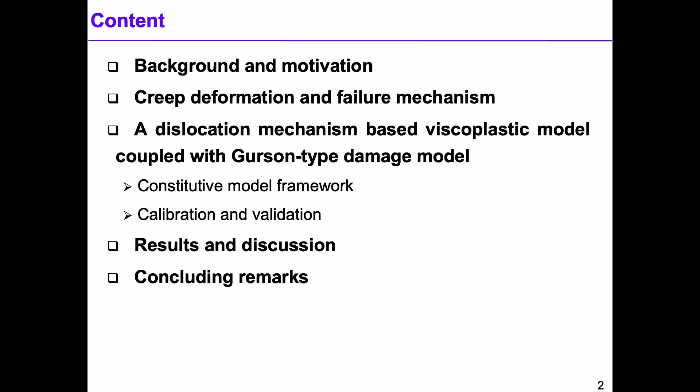Firstly, P91 steel was widely used as structural materials in power plants. Premature failure, such as type 4 cracking, usually occurs when creep loading is applied. This phenomenon is related to microstructural evolution coupled with micro deformation. So the main objective of the present work is to understand the deformation and failure mechanism in steels and develop a reliable mechanistic model to accurately predict creep life for safety purposes.

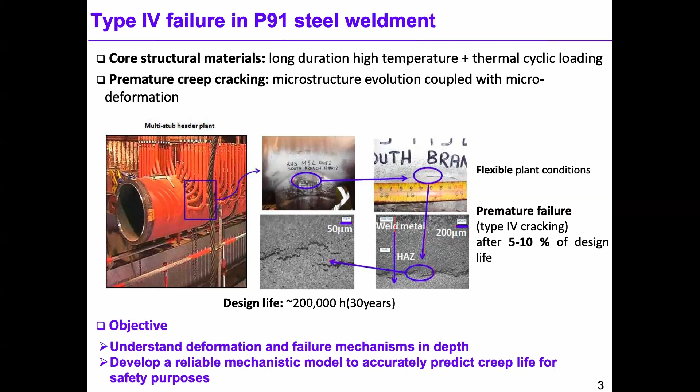P91 steel has complex microstructure: packet, block, and lath with nanoscale precipitates such as carbide precipitates and MX precipitates. Dislocation evolution and precipitate evolution play an important role in creep deformation.

For dislocation, evolution includes 2 parts: accumulation and annihilation. The accumulation mechanism hardens the materials, and the annihilation mechanism softens the materials. In long-term creep service, precipitates become coarsened, which is the reason for material failure.

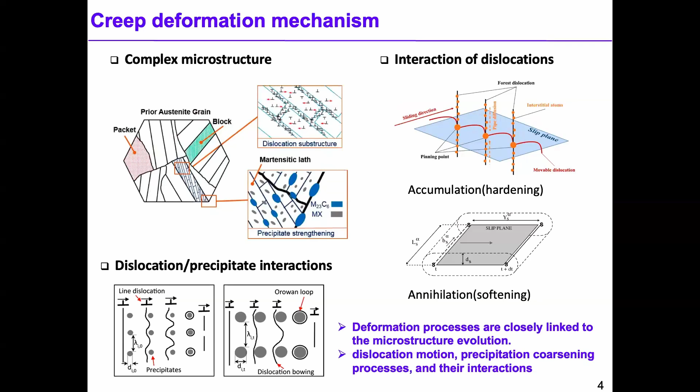Above all, we can know that the deformation process is closely linked to microstructure evolution. So in our research, creep failure is caused by void evolution at high stress range and high temperature.

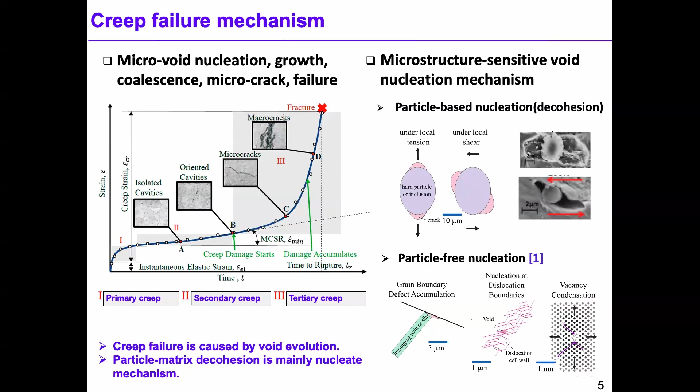Void nucleation can be divided into 2 parts: particle-based nucleation and particle-free nucleation. At high stress levels, particle-matrix decohesion is the main nucleation mechanism, and at low stress range, void nucleation happens at grain boundaries, at dislocation boundaries, and within the grain.

This is my constitutive model framework. Our constitutive model is based on the Gurson damage model. The yield function gives the relationship between macroscopic stress, matrix effective stress, and porosity. This is the key formula in the GT model.

Another key formula is the plastic dissipation rate. Based on plastic dissipation, the global stress-strain and matrix effective stress-strain establish a connection. Void evolution includes 2 parts: growth and nucleation.

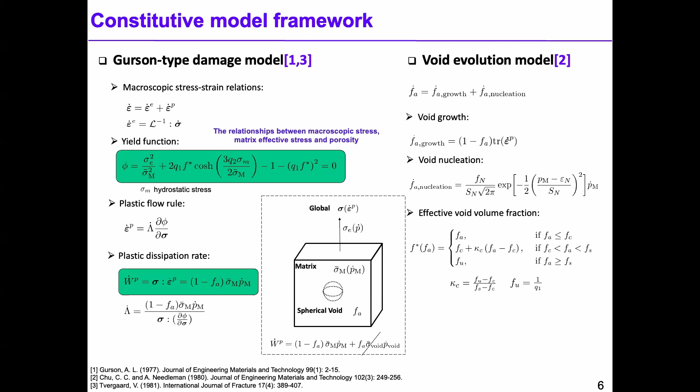Nucleation in our research is governed by plastic strain rate, and the nucleation follows a normal distribution. There are 2 criteria for void nucleation related to decohesion: energy criterion and stress criterion.

The energy criterion states that the strain energy must exceed the surface energy. We can see that the nucleation strain is a size-independent parameter.

For the stress criterion, the local stress must equal the stress required for interface decohesion. The key formula shows local dislocation density increases linearly with local strain. So we can say the nucleation strain is size-dependent.

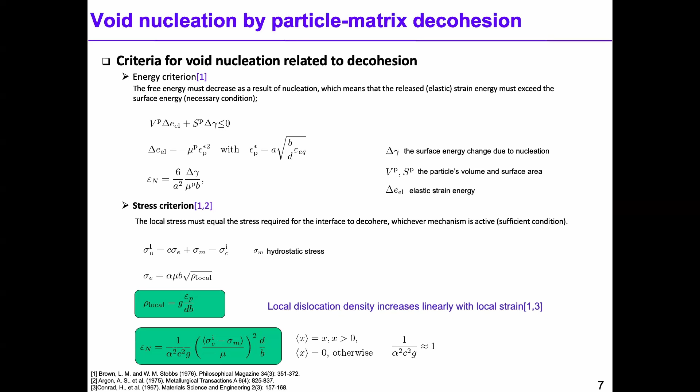In our research, we use the second one. The plastic flow rule of the matrix material at the block level shows creep deformation is controlled by dislocation glide. We use the Taylor homogenization method to get the plastic flow rule of the matrix at the macro level.

The slip resistance can be divided into two parts: dislocation-induced resistance and precipitation-induced resistance. The dislocation density rate can be divided into two parts: dislocation accumulation and dislocation annihilation. The dislocation accumulation mechanism includes precipitation and forest dislocation effects.

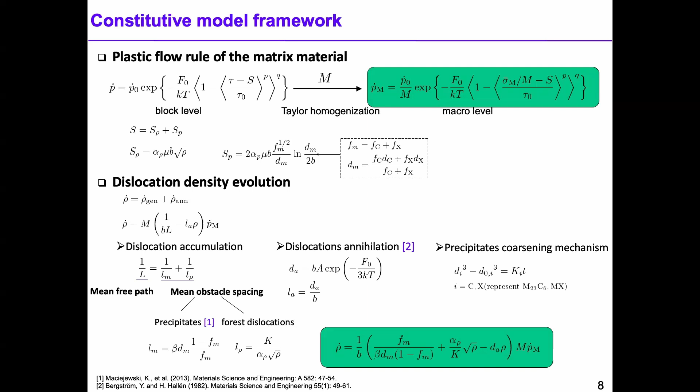For the annihilation mechanism, the annihilation distance is governed by this formula, in which the shrink distance is temperature dependent. In long-term creep service, the precipitate coarsening mechanism is very important. The governing formula is as shown.

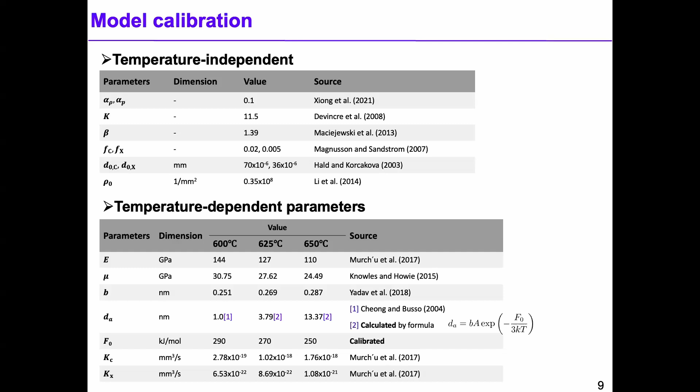The parameters in our model are listed here. All the parameter values are from this reference. All these references are almost exclusively studied on P91 steels. Only a few parameters need to be calibrated.

We use an uncoupled damage model to calibrate flow rule parameters, which define the steady slip resistance at 1% creep strain. So we get the steady state creep rate. We calculate the relative difference using this formula. We can see the temperature factor is included.

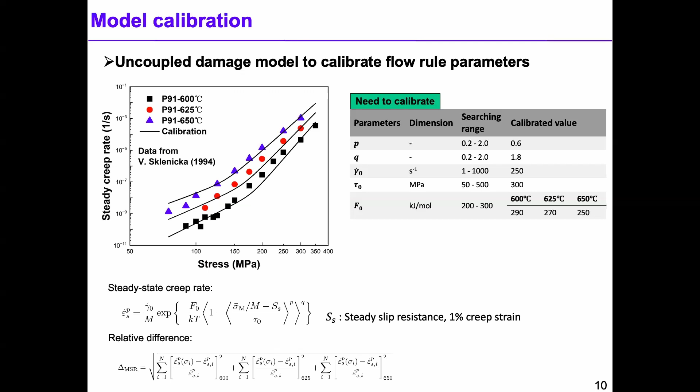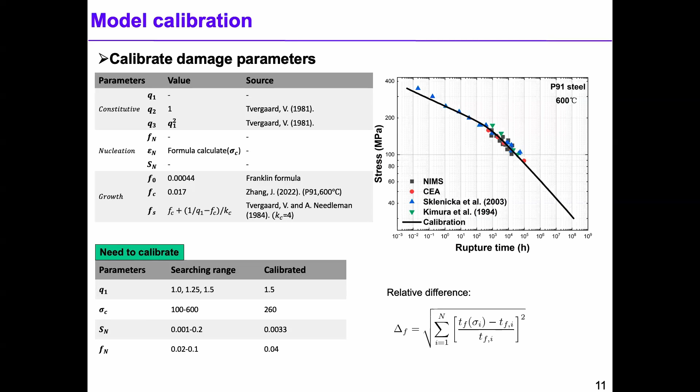We calculated the damage parameter by calculating the fracture time compared to experimental data. In this part, only 4 parameters need to be calibrated.

This is our modeling result. From this picture, we can see our model can accurately capture the creep rupture time across high stress, strain, and temperature ranges.

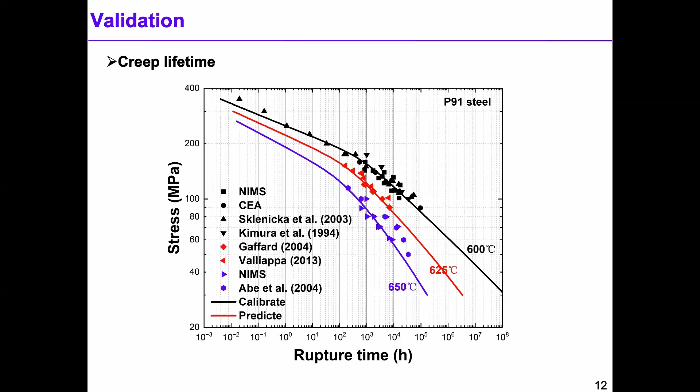This is another type of validation. We can see our model works well in predicting creep strain and creep strain rate.

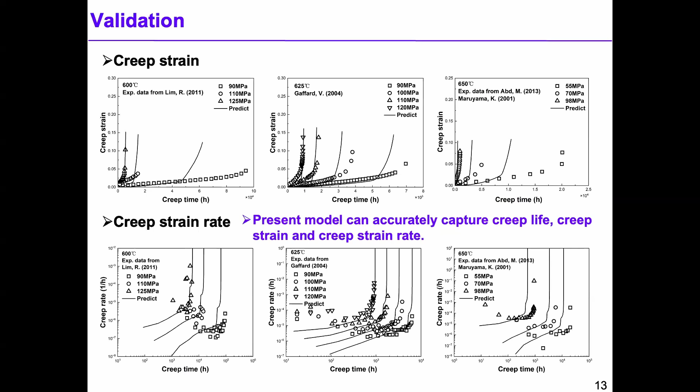Above all, we can draw a conclusion: our model can accurately capture the creep life, creep strain, and creep strain rate. So we can use this model to conduct some similar work.

Firstly, we focus on microstructure evolution during the creep failure process. From the left picture, we can see void nucleation occupies the majority of the creep process. Only when creep strain reaches a certain level does the effect of void growth become apparent. From the right picture, we can see the size of the carbide precipitates coarsens significantly.

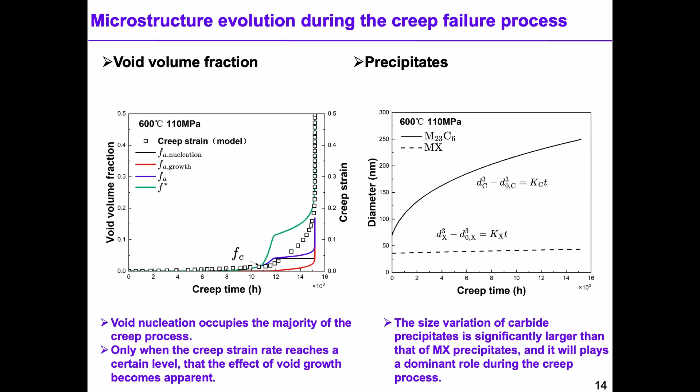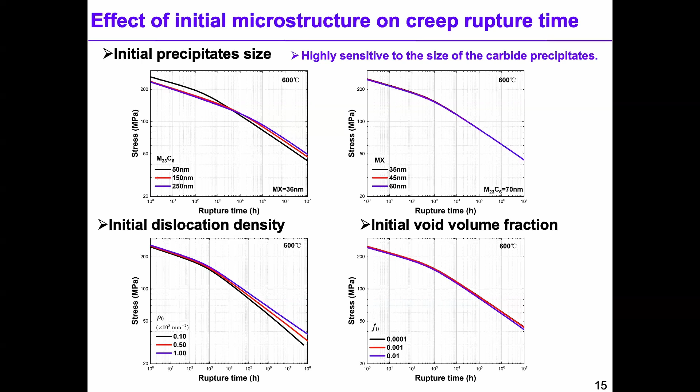Then we discuss the effect of initial microstructure on creep rupture time. From the first two pictures, we can see the carbide precipitates have a significant influence on rupture time. At high stress range, the MX precipitation, dislocation density, and void volume fraction have only a slight effect.

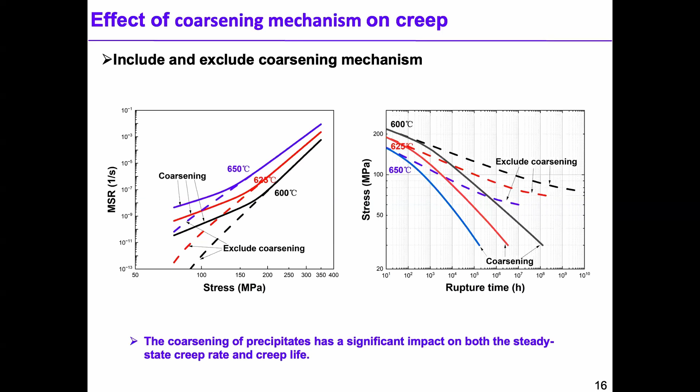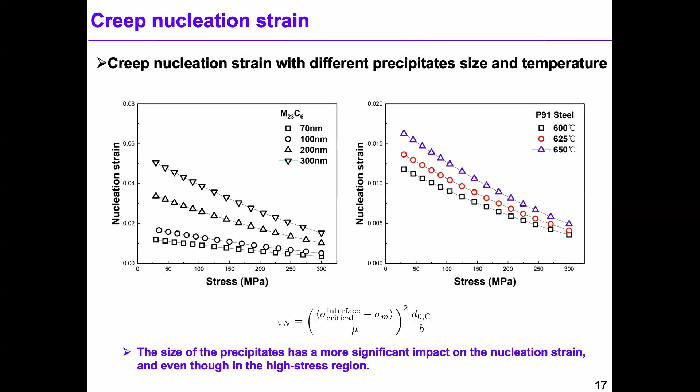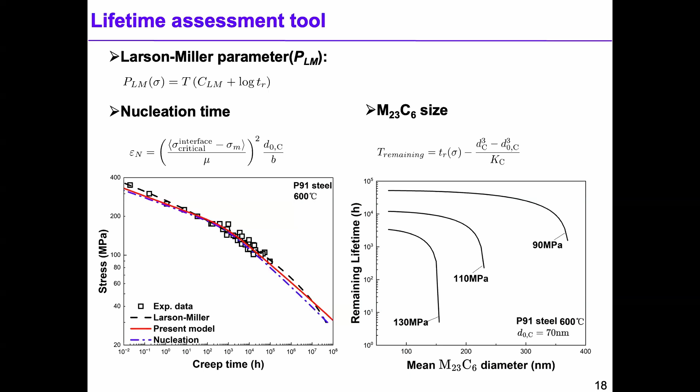Another way we define remaining time, which equals the calculated fracture time minus the precipitate coarsening time. So the result is shown in the right picture.